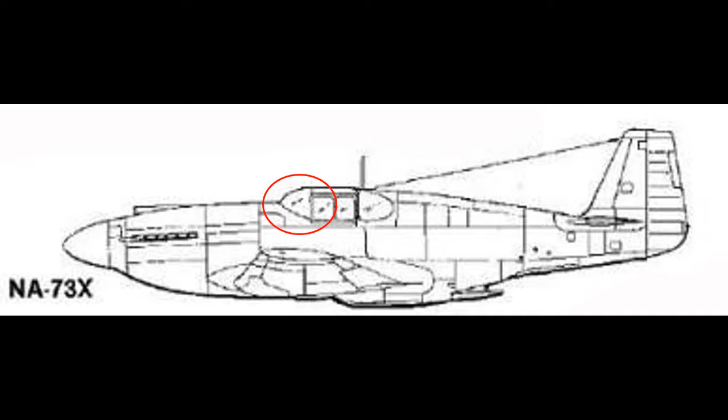So the first flight of the NA73 was on October 26th of 1940, and the last flight was on July 15th of 1941. Depressingly, the final outcome of the NA73 is unknown. Many company personnel remember that when the aircraft was retired from test flighting duties, it was just pushed to the side of the factory, and eventually it just disappeared, whether it got scrapped or donated to a local school or what. Nobody really knows what happened to it, and it's quite a shame considering what the P-51 eventually became.

So next up, we're going to look at the Mustang I. Now, as I said, the Mustang I was only flown by the RAF other than those two airframes that were delivered to Wright Field and classified as XP-51s. So the first few that the RAF bought, the first few Mustang Is that came off the production run, had the shorter carb intake over the top of the cowling.

Now, once they finished the investigation on the prototype crash, the NA73 crash, they came to the conclusion that they needed to extend that. Those were then modified, and as far as I know, none of them were delivered to the RAF overseas with a short carb intake. That was all corrected at the factory before they were officially delivered. However, you can find a few of them out there, pictures of them early in the production run, where they have the short carb intake. So these also had British radios, and they had armor plate installed.

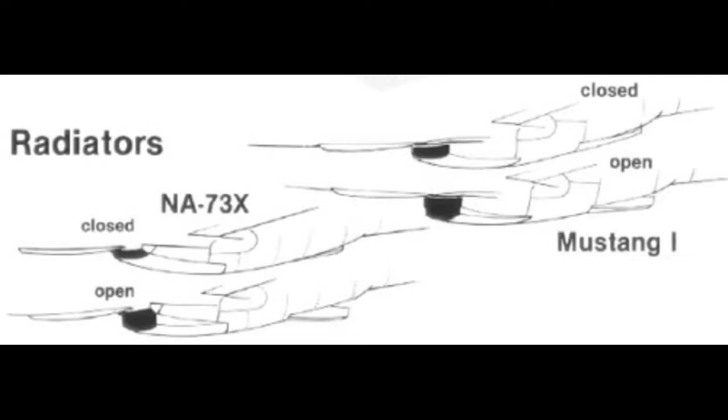So with the Mustang I, the radiator intake was also modified and was slightly enlarged to help with some cooling issues. In this picture, you can also clearly see the variation between the open and closed radiator intake and exhaust doors. So it had an Allison V1710-39, developing 1,120 horsepower at 3,000 RPM. Armament included two .50s and four .303s in the wings, and two .50s in the nose under the engines.

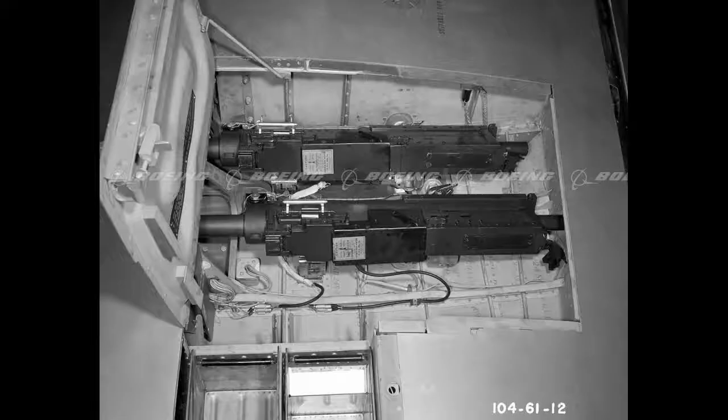At this time, there were very few Mustangs in Europe, and many squadrons were assigned only 1 or 2 and usually flew mixed squadrons, usually alongside Lysanders and P-40s. On July 27th, 2 Squadron did something never done before. Mustangs took off from England and flew all the way into Germany, attacking targets in the Ruhr, the first time an Allied fighter aircraft had done so.

On the 19th of August, the Mustang made its first kill. An FW-190 attacking troops in the Dieppe landing, shot down by pilot officer Hollis Hills, an American pilot flying with 414 RCAF Squadron. This was also, sadly, the first day a Mustang was shot down.

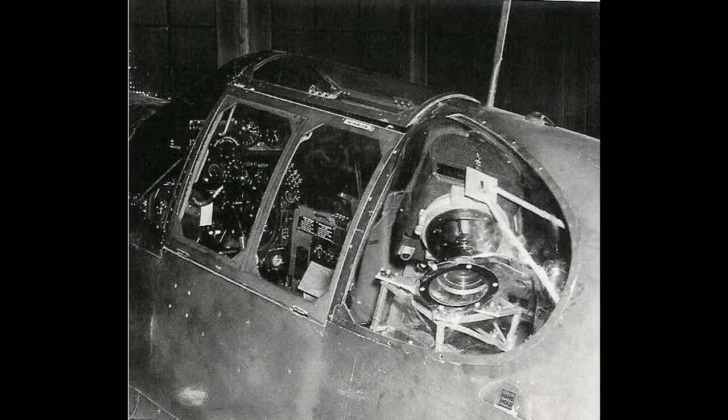Cameras were able to be installed when needed, with one behind the radiator facing downward, and one behind the pilot facing down and rearward through a bulged rear window. So here you can see a standard canopy, and here you can see one with cameras installed. There were no provisions for underwing stores on these early Mustangs. However, that would change in the future, and 620 were built in total. So some identifying features of the Mustang I: it has a long carburetor intake, includes 6 guns in the wings and 2 guns in the nose.

It has a larger radiator intake than the NA73, and it has the armored forward windscreen. So the first flight of the Mustang I took place April 23rd of 1941, and the RAF, surprisingly, still had them in service as late as 1945.

So for the third aircraft that we're going to be talking about, it's going to be the Mustang IA, which is the first, even though it's technically the third iteration of the Mustang, and the second full batch of production aircraft. It is the first aircraft to officially get the U.S. Army Air Force designation of P-51. And as I said, the RAF called it the Mustang IA. And there were 150, which were initially purchased by the U.S. Army Air Corps through the Lend-Lease program.

And as I said, the Lend-Lease program required that the aircraft be purchased by the U.S. and then lent to the Allies to be used during the war, not sold, but lent to them. So the U.S. paid for them and then they were lent. So they were purchased as P-51s, and then the 150 was supposed to be lent to the RAF, but through some wrangling, the U.S. Army Air Forces took over part of that production run and used them as P-51s.

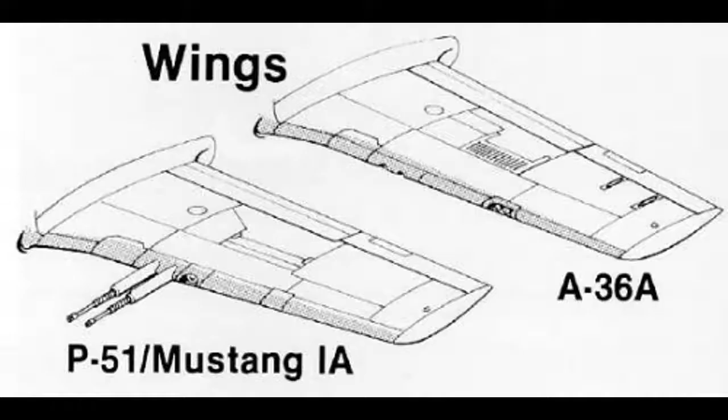So due to the high speeds of the P-51, it was decided to install dive brakes, which you can see pictures of here, in order to reduce the dive speed while bombing. These pop-up brakes were installed both above and below the wings, more or less on the center of the wing. It was also decided to revert back to an all-machine gun armament with two .50s in the nose and four .50s in the wing. A bomb shackle was installed under each wing, but it was slightly inboard of the location on later models, which we'll get to in a little bit.

This was to reduce the stress on the airframe when the aircraft entered into the dive, and in the off chance the aircraft had to recover from a dive with bombs still attached. Other minor changes included the moving of the landing light and the pitot tube due to the installation of the dive brakes. The Allison V1710-87 was installed on this model, producing 1,325 horsepower at 3,000 feet, but the power dropped off significantly above 12,000 feet, a slightly lower altitude than the previous model. One final modification was to remove the inlet door on the radiator intake and leave it as a fixed size.

So North American Aviation used the name Apache during the development of this process, as that was the official name given to the P-51 by the United States Army Air Force while the A-36 was being designed. By the time the aircraft entered service with the United States Army Air Forces, however, the P-51 was renamed Mustang, and the name Invader was officially given to the A-36. For whatever reason, this name never caught on, and most people continued to call the A-36 the Apache.

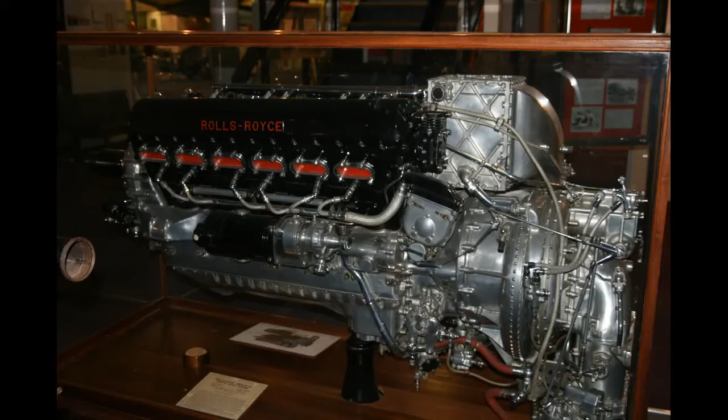At the time, the only engine available that would provide the necessary power was the Merlin 65. Rolls-Royce engineers started to crunch the numbers and came to the realization that with the Merlin, the Mustang would be able to reach a staggering speed of 441 miles per hour at 25,000 feet, an increase of almost 90 miles per hour at altitude, and almost doubling the combat altitude of the aircraft.

A request to install a Merlin in a P-51 for testing was sent to the Air Ministry in mid-1942, and 4 Mustang Is were set aside for the modifications. The approval, however, was never received. The Air Ministry believed that setting aside valuable Merlin engines for testing at this stage of the war was the wrong course of action. Their feeling was, quote, "Why waste time on an untried American-built aircraft?" We can definitely see the world-renowned British sentiment revealing itself here.

A second try at permission was made, this time coming at it from the angle of possibly building an aircraft that could take on, at the time, the far superior Focke-Wulf 190. The bait was taken, and the Merlins were delivered for installation.

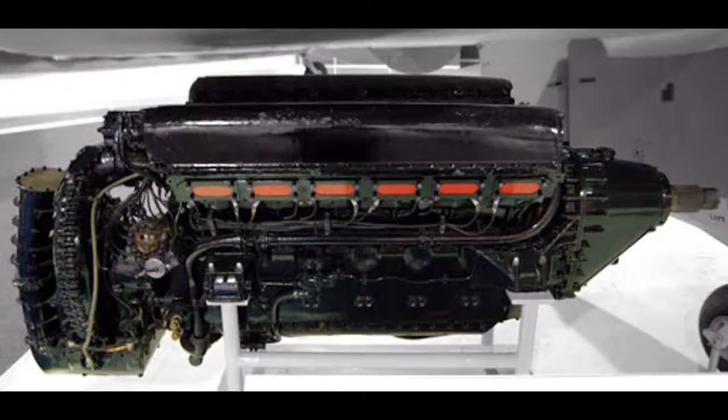Now, the Merlin was an amazing engine derived from the Rolls-Royce R racing engine used to win the Schneider Trophy in 1929. It had a 2-stage, 2-speed supercharger as opposed to the single-stage, single-speed unit on the Allison. This increase in compression on the Merlin, coupled with the Stromberg carburetor which injected the fuel before the supercharger, meant it had to have an intercooler in order to reduce the chances of detonation.

When Rolls-Royce first installed the engine, the intercooler radiator was installed under the engine, similar to a Lancaster or a P-40 design. This was like hanging a barn door from a Lamborghini. As you can see here, the aircraft does not have the clean lines that we would expect of a P-51. So here is where the intercooler was located, and despite this, the performance was outstanding.

A few other modifications that were made included deleting the upper carburetor intake, as the Merlin had an updraft system as opposed to the downdraft system on the Allison. The engine was also slightly larger and required a larger cooling tank. The engine thrust line was raised 3.5 inches and a completely new engine mount was designed. The aircraft had a specially designed 11-foot 4-inch propeller installed to harness this increase in horsepower.

The first flight of the Mustang X took place on October 13th of 1942, and the only fault that was found was a tendency to snap roll when power was added too quickly. Rolls-Royce engineers never accounted for the increase in horsepower of the Merlin and failed to provide adequate fin area. An increase in stabilizer offset, as well as a dorsal fillet, was added to the first aircraft, while the following aircraft had a full 3 square feet added to the fin area.

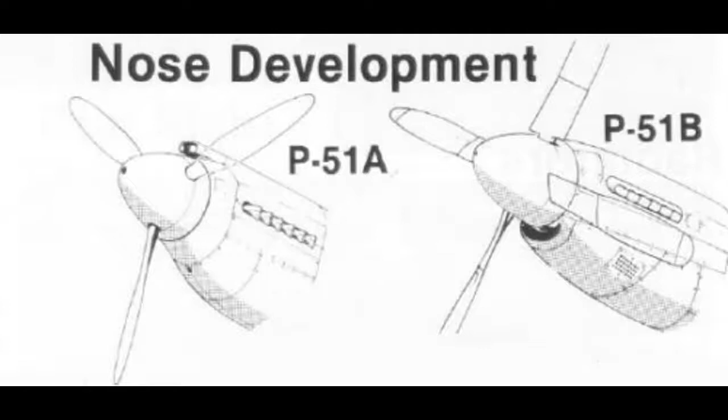With the Merlin-powered Mustang, the exhaust could either be left exposed or have an aluminum shroud installed to minimize drag. The use of shrouds on the exhaust is hit or miss, as some pilots and ground crews preferred to remove them for ease of maintenance and due to lack of spares at forward operating bases.

Other than the cowling and some internal systems changes, the basic design at this point had been changed little from the P-51A design, retaining the wing and armament from earlier designs with 1,250 total rounds of ammunition carried. The modification of the airframe took a staggering 223,000 hours to complete, compared to the 78,000 hours it took to come up with the original NA-73 design.

The XP-51B prototype was completed in late October, a few weeks after the Rolls-Royce design, and ground testing commenced immediately. During the ground runs, it was discovered that the engine temps slowly crept up, but after a thorough flushing, it was deemed satisfactory. On November 30th, 1942, Bob Chilton took the XP-51B up for its first flight. 45 minutes later, he landed with an overheating engine that was leaking coolant and blowing steam. It was later found that the metal of the radiator was incompatible with the glycol and was causing the glycol to gum up and clog the system.

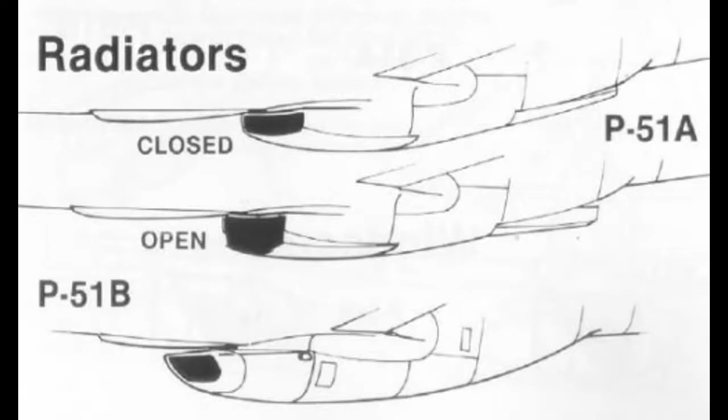A new, slightly larger radiator was needed, and this required a slight deepening of the radiator housing. The initial modification was found to cause excessive noise and vibration, so a complete redesign was needed. The new design deepened the housing further and moved the intake farther down out of the boundary layer of the lower wing. On top of solving the noise and vibration, it also had the benefit of increasing the airflow through the radiator itself. The final benefit from the redesign of the radiator intake was the unintended boost given to the aircraft from the ramjet effect created by the radiator housing and rear door. As stated before, while this did not add a significant amount of overall thrust, it is at least cancelled out by the drag imposed on the airframe from the radiator itself.

This new design not only changed the shape of the housing, but there were significant internal changes. Instead of the radiator and the oil cooler being mounted together, the radiator was moved up and aft, and the oil cooler was installed forward and lower down, with its own intake and exhaust doors. Here's the picture we saw earlier that shows the radiator and the oil cooler locations. This allowed the coolant temperatures and oil temperatures to be managed independently.

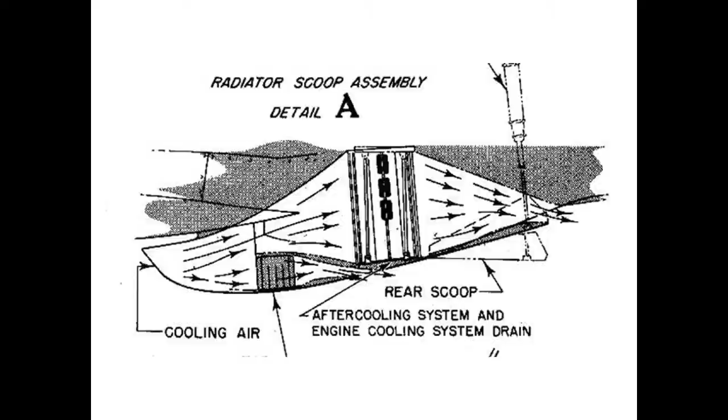With the amazing numbers that both Rolls-Royce and North American Aviation had come up with regards to the Merlin-powered P-51, the United States Army Air Force purchased 400 on the 26th of August 1942, a full 6 weeks before the Mustang X flew, and almost 12 weeks before the XP-51B did. This was quickly followed by an order of 1,000 by the RAF. With production of Allison engine P-51 still going strong, as well as the AT-6 and the B-25, space was in short supply at North American Aviation's Inglewood, California plant, and plans were made to start production at their Dallas factory, which was being used to license build the B-24.

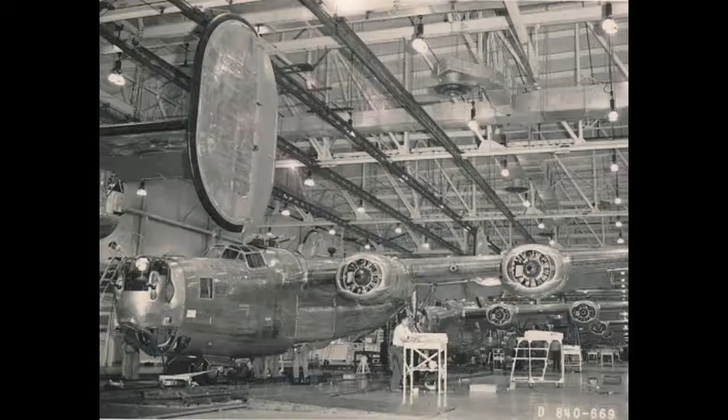P-51s built at the Inglewood plant were called P-51Bs, and the ones built at the Dallas plant became P-51Cs, although both were almost identical in every way. The first flight of a production B was May 5th, 1943, and the C followed on August 5th of 1943. Production aircraft differed only slightly from the prototype B, the major changes being the reduction of depth in the undernose intake and the fitting of modified P-51A hardpoints on the wings capable of holding up to 1,000 pounds of fuel or ordnance.

The first aircraft reached England by ship in September of 1943, and they flew there for the first time in November. On December 1st, the P-51B was flown into combat for the first time and was used on an escort mission for the first time on December 5th. On December 13th, P-51Bs took part in an escort mission to Kiel, the farthest fighter mission to date in the war of just over 1,000 miles round trip. This mission also included the first kill for the P-51B, and while the escort fighter had arrived, it wasn't perfect. Many pilots complained of a number of deficiencies with the airframe, but there were two that were most common: jamming guns and poor visibility.

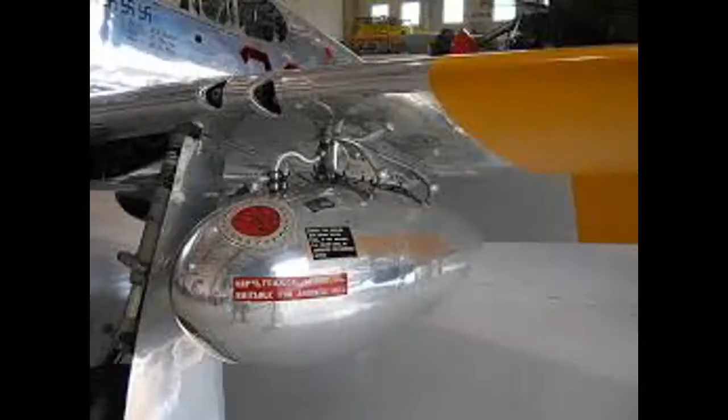In early 1941, work quietly began in the U.S. Army Air Force to get a drop tank designed for the P-38, and when the P-51B rolled around, the only tank available was the 75-gallon aluminum model. Many leaders in the United States Army Air Force, who were mostly members of the bomber mafia, were able to veto the use of these in combat, not only due to their belief of the useless escort fighter, but by pointing out that as a strategic material, dropping these empty tanks over Germany was effectively helping the enemy.

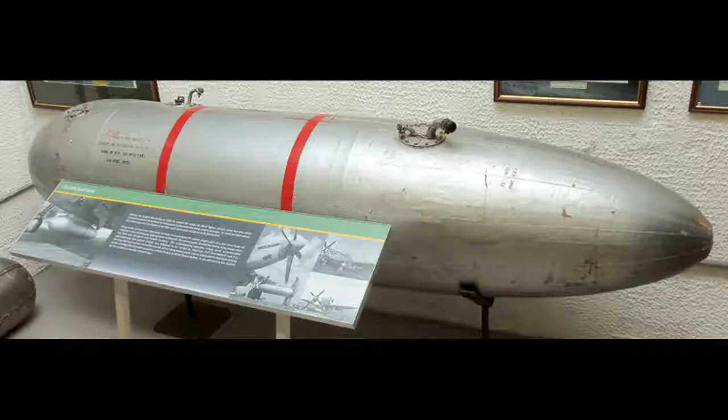These tanks would be dropped when entering combat so as to decrease weight and drag and increase its performance, and as such, they would have to be used first so as to waste as little fuel as possible. The only problem was a negative reaction between the glue and the fuel, limiting fuel storage time to 8 hours in the tank.

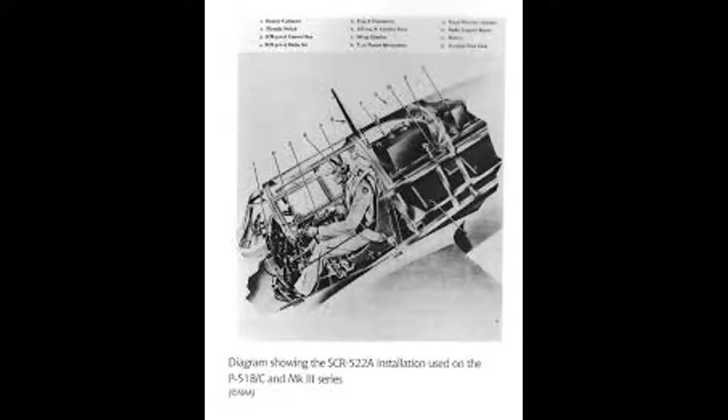The final addition of the P-51B, partway through the production run, was the installation of an 85-gallon fuel tank located behind the pilot just above the radiator. So this increased the internal fuel by 50%, and when used in conjunction with drop tanks, gave the aircraft unbeatable range. Some of the early production P-51Bs had the fuselage tank retrofitted before delivery.

This tank did not come without problems. When fueled, the tank caused serious lateral control issues, and diligent fuel management by the pilot was necessary to ensure that the drop tanks were as empty as possible and the fuselage tank was low enough to allow combat when contact with the enemy was made.

There are several block numbers in the production run of the P-51B and P-51C, and each one signifies a change in design or a new purchase contract. I will briefly go over the significant block numbers and the equipment installed and changed, although not all changes are detailed. P-51Bs had an NA suffix, while the P-51C had an NT suffix, denoting the factory they were built in, Inglewood and Dallas respectively. These would allow replacement parts to be traced back to their original location.

So first, let's go over the P-51B. It started off with the P-51B-1 NA, which is the initial block with the V1650-3 engine, no fuselage tank, and 399 were built. Next was the P-51B-5 NA, and it had the V1650-3 engine installed. The fuselage tank was now installed. It had minor radio changes, and there were also some structural and minor component changes.

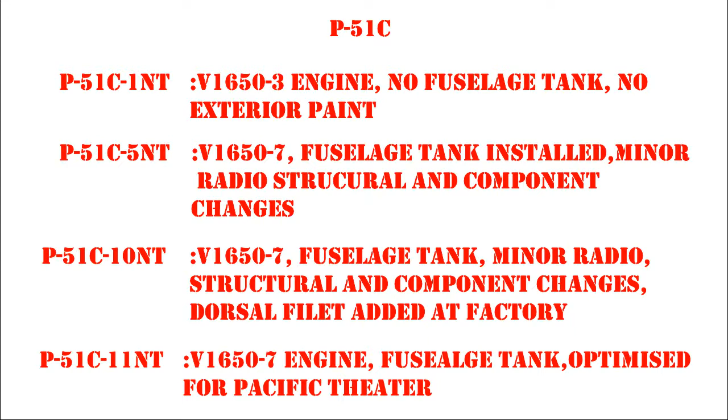The final version from the Dallas factory was the P-51C-11 NT, and it had the V1650-7 still fitted, the fuselage tank was installed, and these particular aircraft were optimized for the Pacific Theater. Now, unfortunately, I could not find what these optimizations were, just that they were optimized for the Pacific Theater, and 127 of these were built.

Now, out of the total production run of P-51Bs and P-51Cs, 91 aircraft, 71 Bs and 20 Cs, were fitted with oblique cameras just ahead of the tail wheel and became known as the F-6B and F-6C respectively. In all cases, the guns were retained to provide a combat capability.

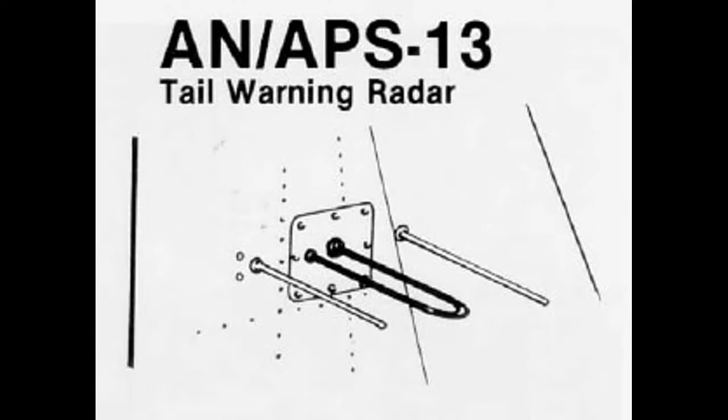Another technological feature that was added to some aircraft was the AN/APS-13 tail warning radar. This would alert the pilots when there was a radar painting the aircraft from the rear. As it could not distinguish between friend or foe, most pilots removed it and relied on the rear view mirrors, as the warning bell was distracting during aerial combat.

So what are some of the identifying features of the P-51B and P-51C? First and foremost, the forward cowling is completely changed, and it has no upper intake, and it does have a lower nose intake. So it still has the razorback fuselage. Some models would have had the Malcolm hood installed, and then it has the deeper lower radiator intake, and it has 4 wing-mounted machine guns.

So in total, there are 1,988 P-51Bs built in Inglewood and 1,750 P-51Cs built in Dallas, with 276 B and 626 of the C models going to the RAF, where they were designated the Mustang III. They were also flown by the South African Air Force, the Chinese Air Force, and the Soviet Union. The final P-51B was retired from the United States Army Air Force in 1949, having been redesignated the F-51B in 1947.

So with the P-51Bs and Cs now entering combat in Europe, North American Aviation started to collect pilot reports and combat data from the war zone in order to ensure that the next production version of the P-51 would correct many of the errors and mistakes and problems that existed in the existing designs. Two common issues basically kept coming up with the airframe.

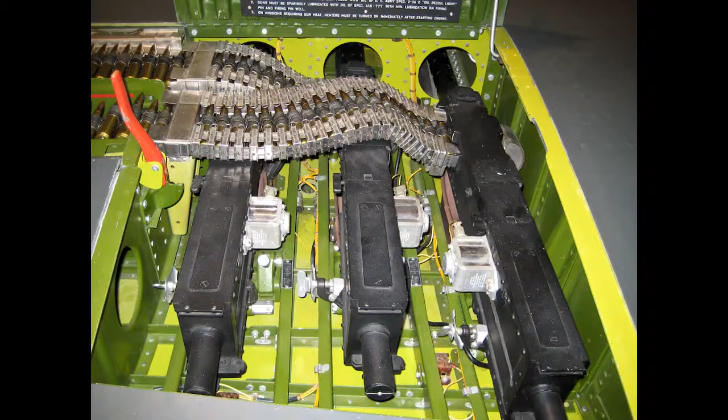So the armament seemed to be the easiest of the problems to solve. Just add a third .50 caliber machine gun to each wing. Problems arose, however, with the lack of space due to the thinness of the B wing, and it was decided to redesign the wing to allow the guns to sit vertically. This setup would provide the space needed for the guns, and it would also solve the problems of the guns jamming while in combat. The new wing was slightly deeper to provide this room, and this led to a slightly lower top speed than the B model.

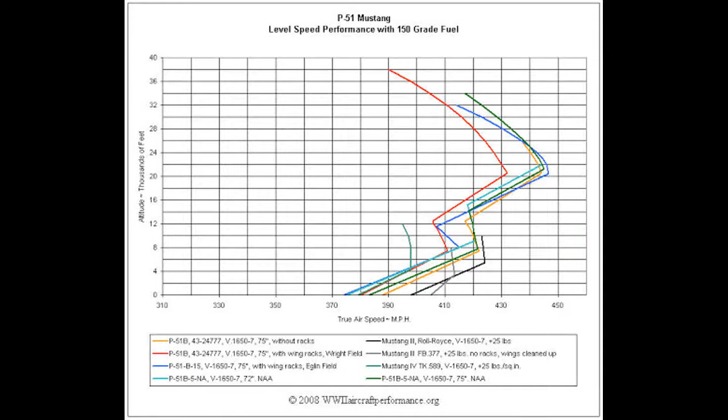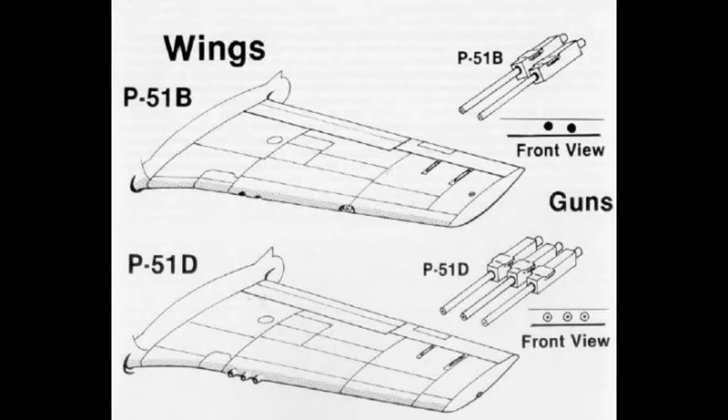The improving of the pilot's visibility was a problem that would require much more work to solve. With the advances in plastic technology that came about thanks primarily to the nose glazing of the bombers of the day, think of the B-17, the B-26, and the A-26, it was decided to fit a blown, teardrop-shaped canopy onto the aircraft. This meant that the rear fuselage would have to be redesigned with the high back cut down to the same height as the engine cowling.

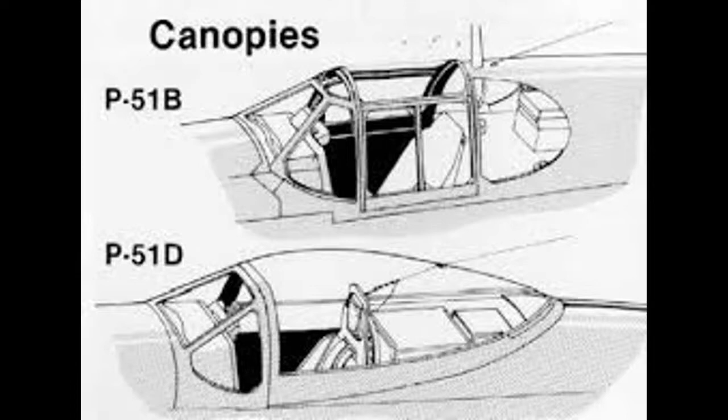The canopy was then designed to fit around this contour on a centrally mounted track, and a new forward windscreen was made into this canopy, as seen here. This not only allowed the full 360-degree visibility, but also increased the comfort for taller pilots in the already cramped cockpit. After wind tunnel tests proving the basic design was sound, the first D model was flown for the first time on November 17, 1943, about a month before the first B even entered combat.

Like the B model, early P-51Ds did not have the fuselage tank installed, and this was added to later blocks as they rolled down the production line. The known stability issues with this tank, added with the cut-down rear fuselage, meant the D was even more directionally unstable than the B, and it was decided to add a small fin fillet in front of the tail. This fillet greatly added to the stability of the airframe, and kits were produced and sent out to combat units to be added onto aircraft already in service.

Some units who were still flying the B model added these fillets to the aircraft, offsetting the instability due to the fuselage tank. And as we saw in the C production block breakdown, the fillets were added to the final production run at the factory. Zero-length rocket launchers for 5-inch rockets were added partway through production and were similar to what was installed on the F4U Corsair. So here you can see the rocket launchers on a post-war Air National Guard P-51D.

As before, these aircraft were built in both the Inglewood and the Dallas plants, but both aircraft kept the D suffix. The P-51E designation was initially set aside for Dallas-built aircraft, but was later abandoned.

The only difference being the NA suffix for Inglewood and the NT suffix for Dallas being used in the block numbers. These block numbers were used to denote significant changes or new orders throughout the production run of the aircraft, the same as in the B and the C model.

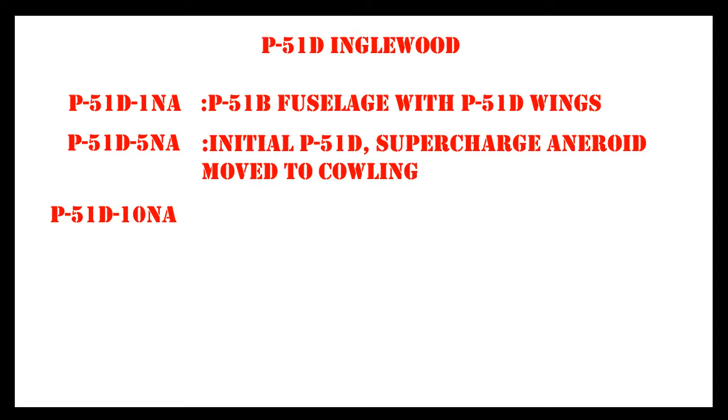Next up is the P-51D-10NA. Some more minor changes in this one. So the elevator bob weight was added to reduce stick force. The bob weight was just a small lead weight forward of the hinge line on the elevator. The dorsal fin was added. Reverse boost tabs were added, and these were used to increase rudder resistance at high speed. The mechanical oil temperature gauge was replaced with an electrical unit, and the 2-speed booster pump switch was replaced with a single low-speed switch. So 800 of these were built.

The P-51D-15NA standardized landing gear warning lights. It replaced the direct reading fuel pressure gauge with a pressure transmitter, 900 built. The P-51D-20NA, so this is when the zero-length 5-inch rocket launchers were installed under the wings. And the provision for bazooka-style rocket launchers was also added. The manual primer pump was replaced with the electric. And the K-14 computing gun sight was added. And 1,600 of this model was built.

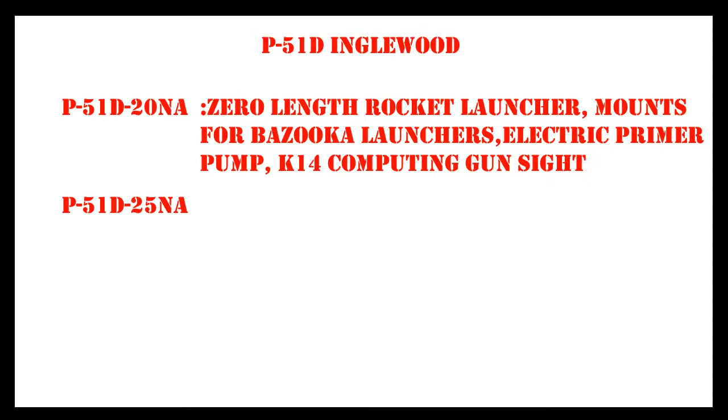So next was the P-51D-25NA. So in this one, the fabric-covered elevator was replaced with a metal-covered one, and there was a slight change to the angle of incidence of the tail. So 1,600 of these were built. So the P-51D-30NA basically was similar to the -25NA, but they were just purchased in a later batch later in the war. 800 of those were built.

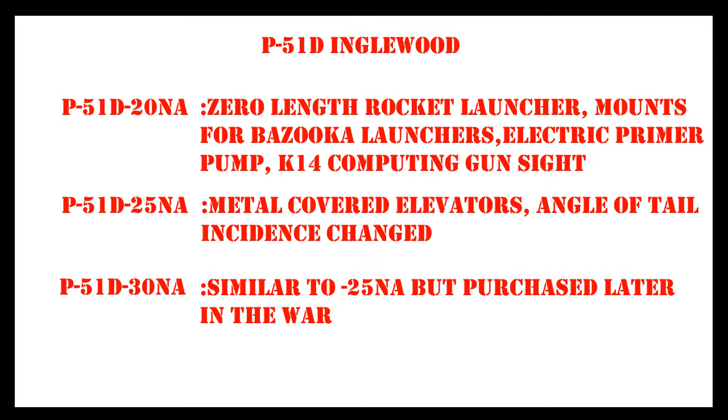Now, similar to what you saw with the Bs and the Cs, the Dallas-built Ds don't quite line up with the Inglewood block numbers since the production runs began at different times, and so some modifications were added at different times in the production run. So you might see some minor changes here. So Dallas started off with the P-51D-5NT, and again, this was the initial D model with a fin fillet. It had the fuselage tank, and the elevator bob weight was added to reduce stick force. 200 of these were built.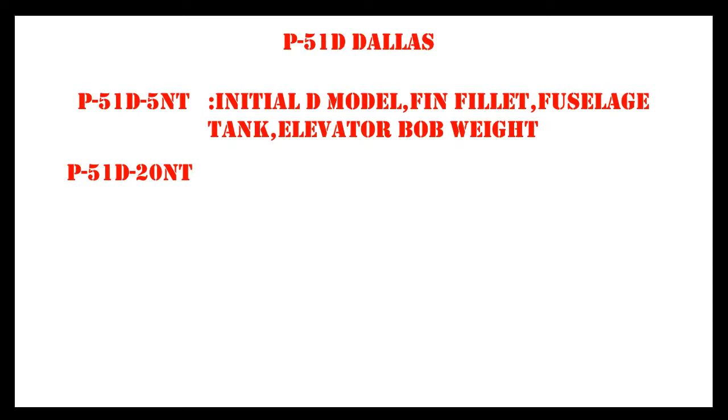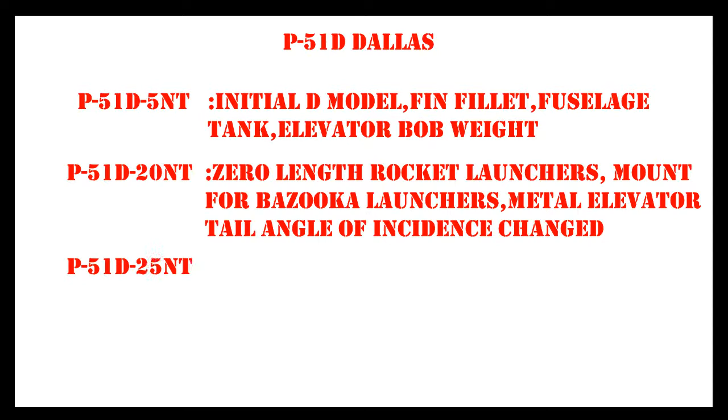P-51D-20NT. This is when the zero-length 5-inch rocket launchers were installed under the wing and provisions for the bazooka-style rocket launchers were added. The fabric covered elevator was replaced with the metal-covered one, and there was a change to the angle of incidence of the tail, and 400 were built. So the P-51D-25NT replaced the direct reading fuel pressure gauge with a pressure transmitter, and the manual primer pump was replaced with the electric one. 600 were built. And then the P-51D-30NT, again, just like with the NA versions, was similar to the 25NT, but purchased through a late order. 400 were built.

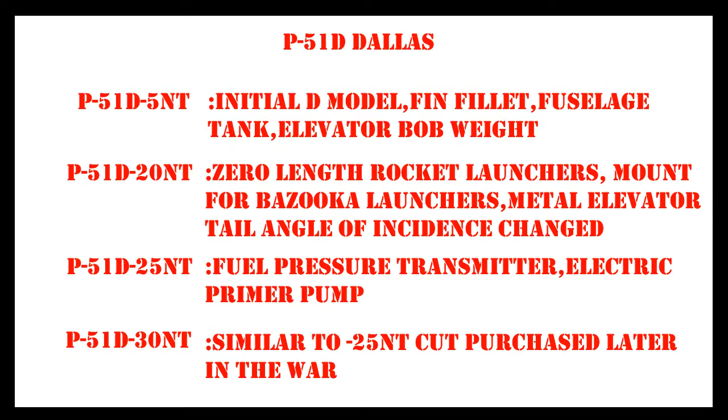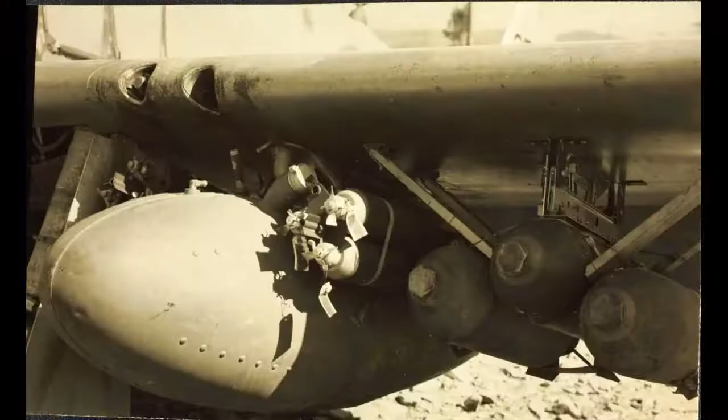Now, the other thing we need to look at are some of the many field modifications that were performed on the P-51D, and we'll go over a couple of highlights of these here. So first of all, there were modifications allowing a P-51D to carry the 10-inch Tiny Tim rocket, which is a massive rocket. You'll see a picture of it here. It is just insanely large when it's mounted on the P-51. There were also setups for multiple bomb racks. So the one bomb shackle was designed to carry multiple bombs. And here's actually a picture I found of a triple bomb setup that was rigged in the field.

And I've even read, I should say, of modifications to have twin drop tanks. I haven't been able to find any pictorial reference of this, but there is anecdotal written evidence of P-51s carrying 2 drop tanks on each wing. So that would have been pretty cool. Now, the ones you just saw here were never sanctioned by North American Aviation or the United States Army Air Force.

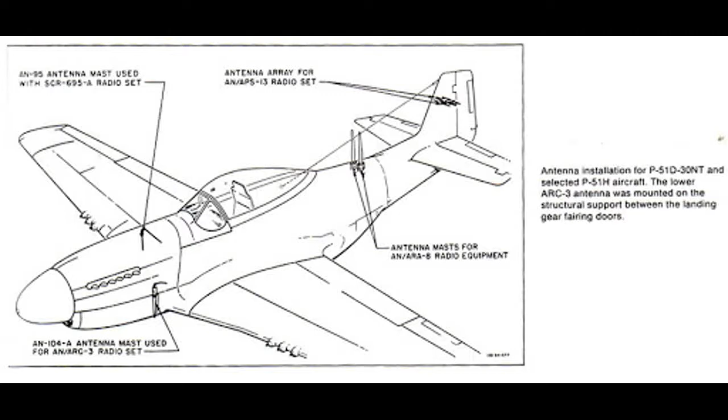The only field mods that were sanctioned were radio navigation equipment that was fitted to the Pacific-based P-51s. Now, this was due to the extreme distances that were flown over the ocean where no landmarks or bearings could be taken. Now, this setup was called the Uncle Dog radio setup and included two radio masts behind the cockpit, a radio mast under the cowling, and another aft of the right main gear. So you can see the twin rear and undernose antenna in this picture. It is very hard to find clear shots of this system, and some also had a DF loop just in front of the fin fillet.

So some of the identifying features of the P-51D are: look at the Merlin engine, the bubble canopy, six machine guns in the wings, cuffed props, although sometimes they were removed in combat, so an uncuffed prop could still technically be a P-51D if a lot of these other features are met. So it has the leading edge wing kink.

One of the more interesting ways to look at it, if you look at the forward cowling vent, the D model had one corner cut off. So it wasn't a perfect square. It had one corner cut off, and that will make sense in a little bit. And there were no fin fillets on the early models. That's an easy way to tell the early model P-51Ds from the later model. Although, as I said, some of them got them added on after, so it isn't always a perfect way of telling it.

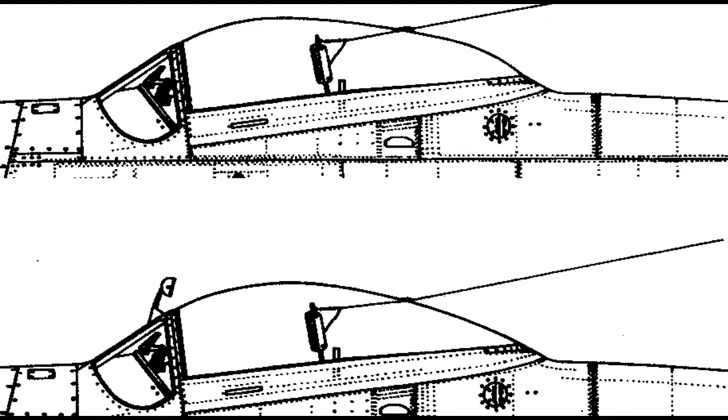Another feature of the K is a slightly larger canopy to give more headroom to pilots, but the difference is very subtle. So here you can see the slight difference at the back of the canopies in this drawing, and this canopy is usually referred to as a Dallas-style canopy.

Many of the Ks in the field had the Hamilton Standard props installed, and some even had the older V1650-3 engine installed, so without looking at a data plate or a serial number, it can be hard to tell the difference between a D and a K. Most modern warbirds are difficult to identify as many have cuffless Hamilton Standard props, and some even have had a Dallas canopy installed to a D model to allow more headroom for second seats to give ride programs.

So some of the significant block numbers for the K are the P51K-5NT, equivalent more or less to a P51D-10NT. So it's got a 2-speed booster pump switch replaced with a single low-speed switch. 600 were built. The P51K-10NT replaced the direct reading fuel pressure gauge with a pressure transmitter, replaced the fabric-covered elevator with a metal-covered one, and changed the angle of the tail incidence. 600 were built.

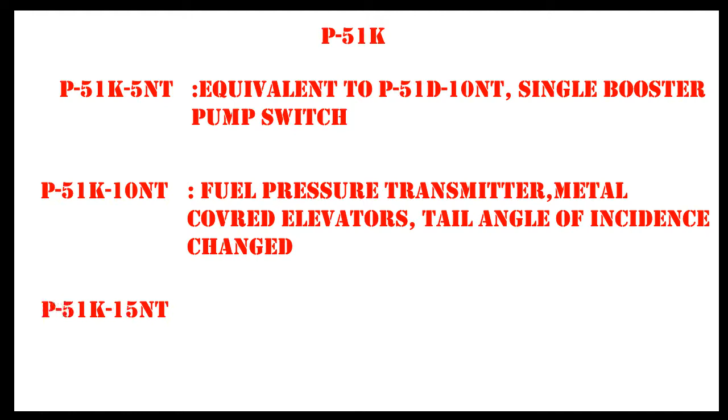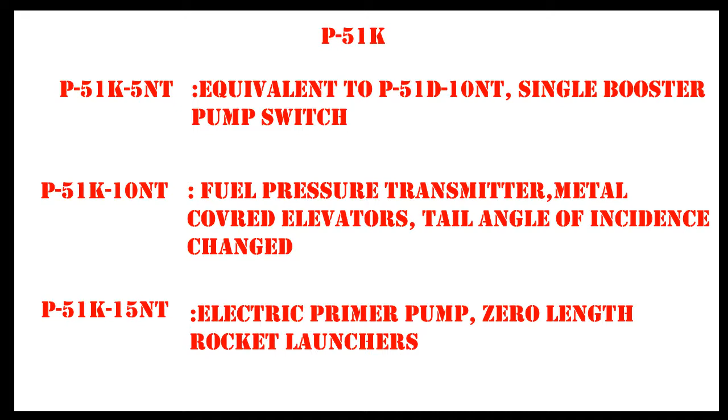The P51K-15NT: the manual primer pump replaced with an electric one, the zero-length rocket launchers were installed onto the wings, and 300 of those were built. So some of the distinctive features of this model are, overall, similar to the P51D, a larger bubble canopy, and the uncuffed Aero Products prop.

So a total of 1,337 K models were built, with 594 going to the RAF as the Mustang IV-A, 87 being shipped to the RAAF, and 163 being converted to the F6K standard, which was basically the same thing as the F6D photo reconnaissance model.

So due to the difficulty of visually identifying a K model, many pictures and sources refer to them simply as P51Ds, especially as, I said, in combat, most of the K model props were replaced with Hamilton Standard props, and when you start getting into combat scenarios with parts being intermingled, the K models very quickly lost their identity, and it's very hard to keep track of what is what once they hit the field.